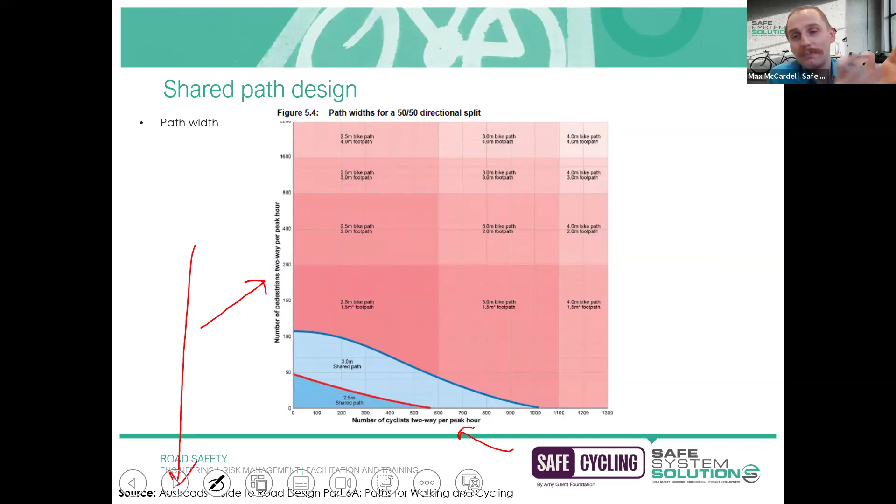What I really want you to take from this graph is if we look at just the extremes of both the x and y axes, in the top right-hand corner... sometimes my pen does that, and I'm not sure why. I've tried different pens, and sometimes it fixes itself, but sometimes it goes all glitchy. Let's try again.

If we have a look at the top right-hand corner there, you can tell these webinars are live by that kind of little mistake, though, which is good.

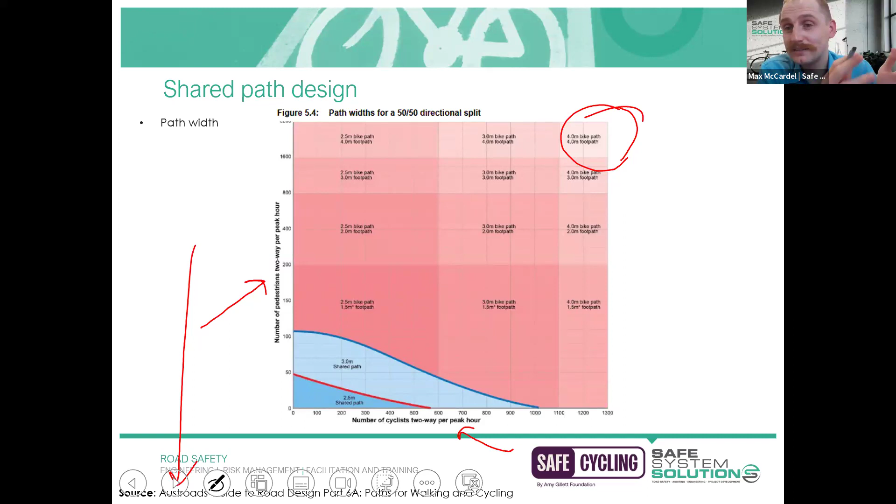Austroads is actually recommending a 4 meter wide bike path and a 4 meter wide footpath, because you've got such high volumes of pedestrians and cyclists that it's not appropriate to make them share one space - let's separate those facilities. This helps explain the reasoning behind that previous photo, but I fully appreciate that a lot of our design work is in the built environment, so creating an 8-meter space for active transport could be very challenging - it could mean knocking down buildings and things like that. So take all this with a grain of salt; you have to reflect on your constraints, but aspirationally it's a very good principle to have.

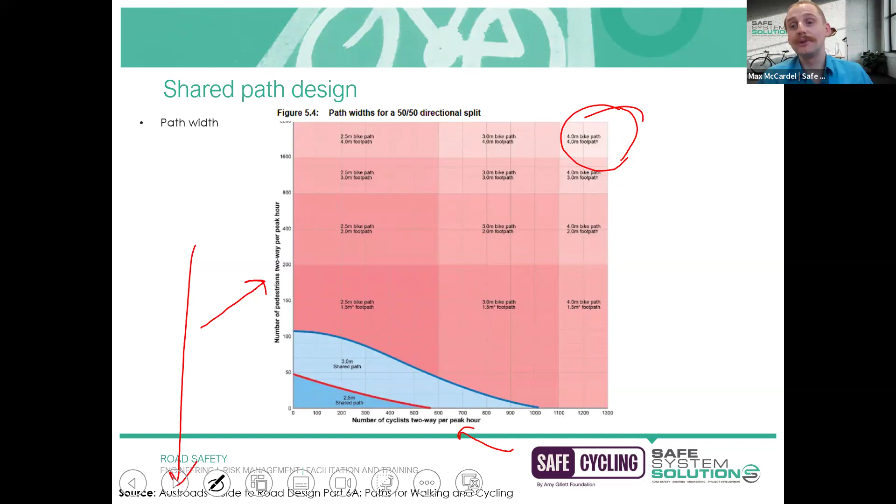Another way we often derive what our shared path width should be designed at is this idea of categorizing the function of the shared path. Austroads has three broad categories: a local access path, a regional path, or a recreational path. The latter two categories are pretty fluid with a lot of overlap, and there's no tight definition that easily points you to one or the other - that's just my take on it.

The local access path, shown in the photo on the left, is a shared path that wouldn't really have significant throughput traffic. If you've done road use hierarchy training, think of this like your local streets, not designed to have an arterial function - it's just trying to get a few riders into that local area, connecting to a residential community, but not commuter traffic. In those environments, we can look to adopt lower widths for shared paths.

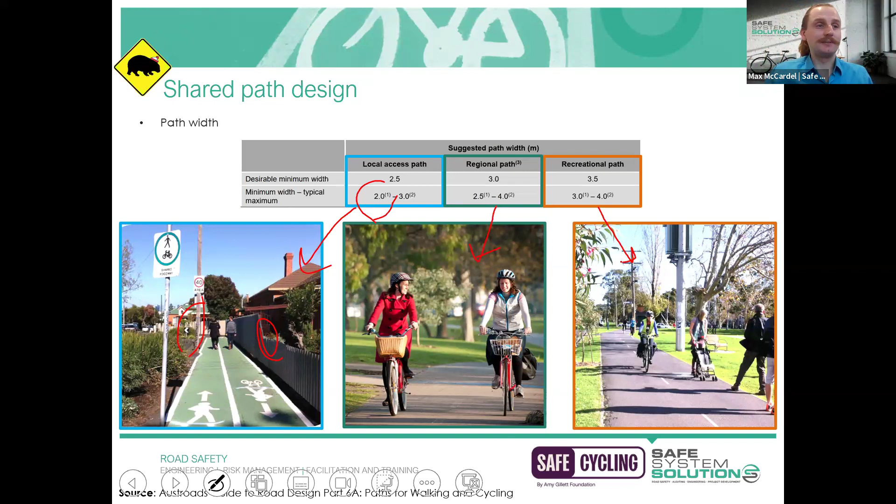Okay, let's look now at gradient. So we've picked our shared path width, say we're adopting a 3 meter wide shared path. Something we should consider is what is the gradient or steepness of our shared path. If you've done any surveying, you'd be able to work out your vertical geometry along the alignments. This graph in particular is used amongst the design community to determine how well received or how feasible constructing a specific grade is for the cycling community.

I think this figure is about 20 years old, probably older, maybe even from the 90s, so it's been around for ages. There's probably an argument that if the fleet is looking more like e-bikes, and uphill gradients aren't an issue for them, then perhaps this figure should be recalibrated to reflect that the typical bike is a bit different. But conversely, we're also seeing more heavier bikes, like cargo bikes, which would certainly feel the effects of the uphill grade. So there's lots of debate in industry about how applicable these graphs are, because they were developed so long ago with an idea of what a bicycle looks like, and the fleet really does look quite different.

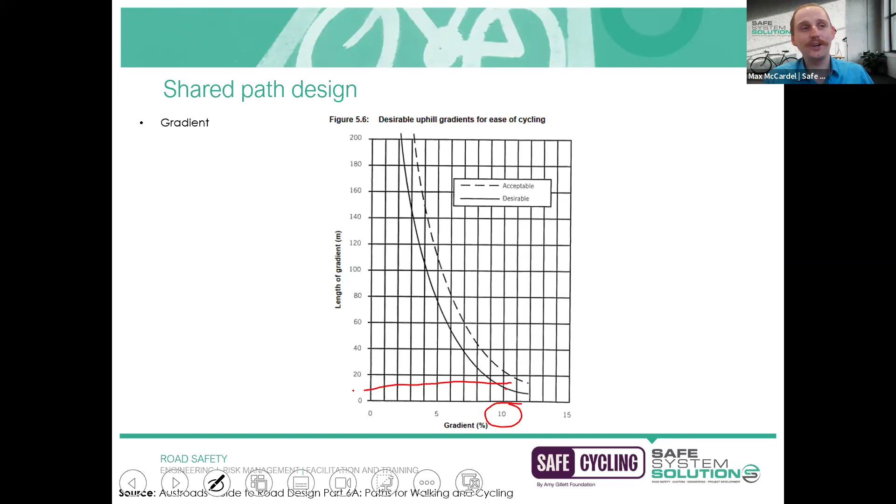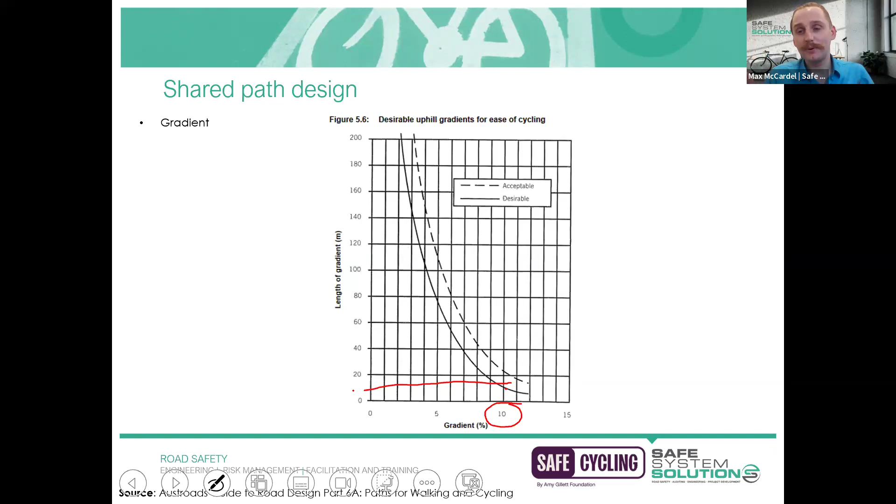What is probably less well engineered generally is, so you've got the understanding that uphill gradients can be an issue for riders, but we also need to think about if it's a shared path, it is likely two directions, meaning riders would also travel down that steep gradient.

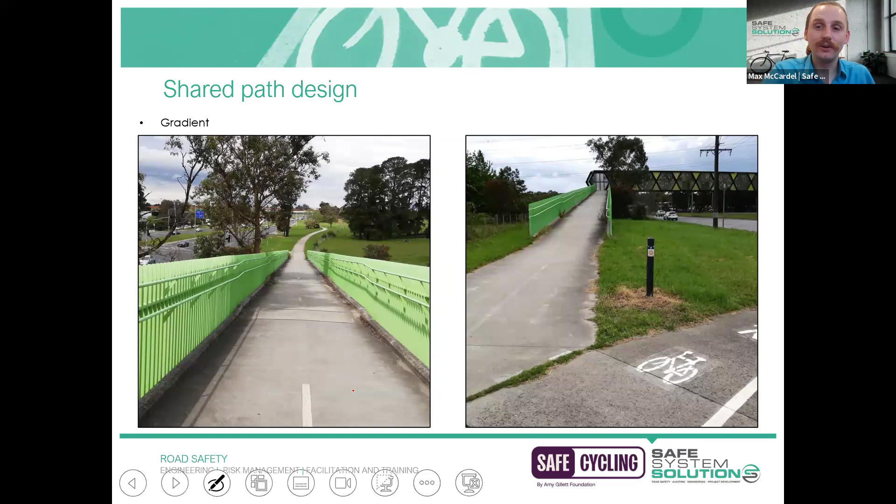Now, I've given this example here. This is a shared path that crosses over a carriageway, so you can see the overhead structure there. And the photo that is taken on the left is positioned right at the top of that ramp.

I've got a question for the group, so get ready to type your answers in the chat. I want you to try and work out what could be a risk for a rider traveling down this ramp. So the question is, what is a risk or risks that you can identify for cyclists riding down this ramp? I'll give you 30 seconds to have a think and get your typing fingers warmed up, and I'll check in with Catherine and Marissa if I've missed any questions.

Hello Max, thank you very much. Just wanted to make a point that in some jurisdictions across Australia, you are actually allowed to cycle on the footpath, in WA, South Australia and Queensland, and that's not the case here in Victoria. Just wanted to raise that because I thought there were some good discussions there, because there's also challenges to that, but also some benefits as well.

Yeah, so very good points. Also in Tasmania, you're allowed to ride on footpaths. There is, in the LMS resources, a quite useful resource guide provided by Victoria Walks, where they actually talk through the issues with shared paths and more broadly riding on the footpath, which goes through some evidence that's been collected over the years and some of the collisions that have happened with people just using the footpath. I kind of understand the argument on both sides, but yeah, it's a good read if you are working within that space.

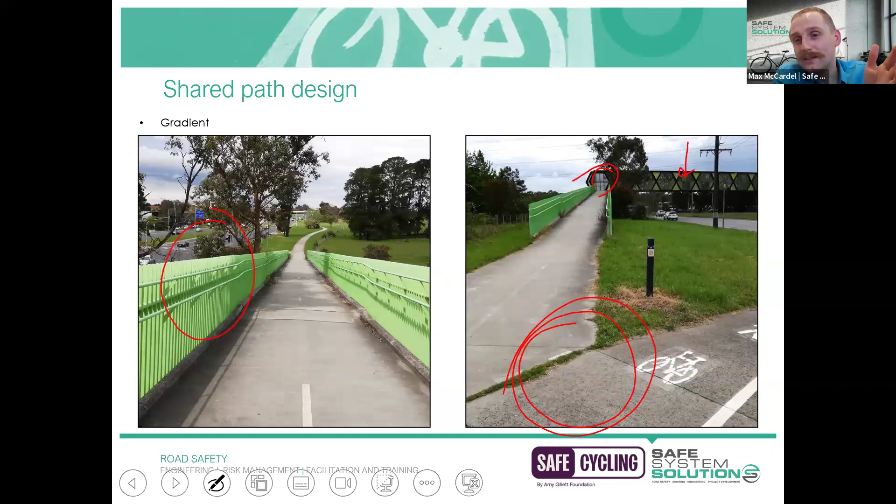So I think that's great that we've already picked up on that. And I also think it's great that people have identified that there are sightline issues with the kind of nice fencing, balustrade area that's being used there on the side. That actually provides like a solid wall, basically. So it's very, very difficult for you to be able to see any riders that may be approaching that conflict point. So not an ideal scenario.

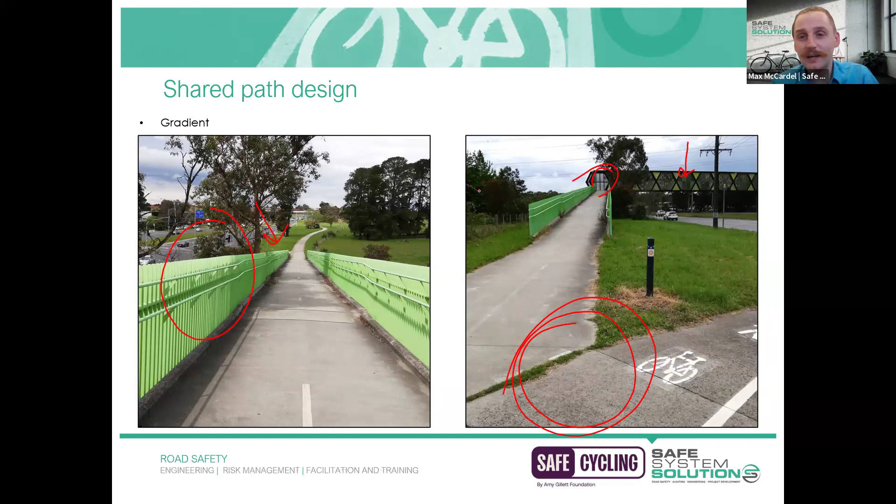We actually conducted a road safety audit, a cycling safety audit, at this particular site and picked up on this as a finding, and recommended that instead of having the conflict point right where we've got those sightline issues and also the high speeds for riders, can we move the conflict point further away so it's much easier to see, and also riders have washed off some of that speed. And very happy to report that has been constructed since, and we don't have that sightline issue there.

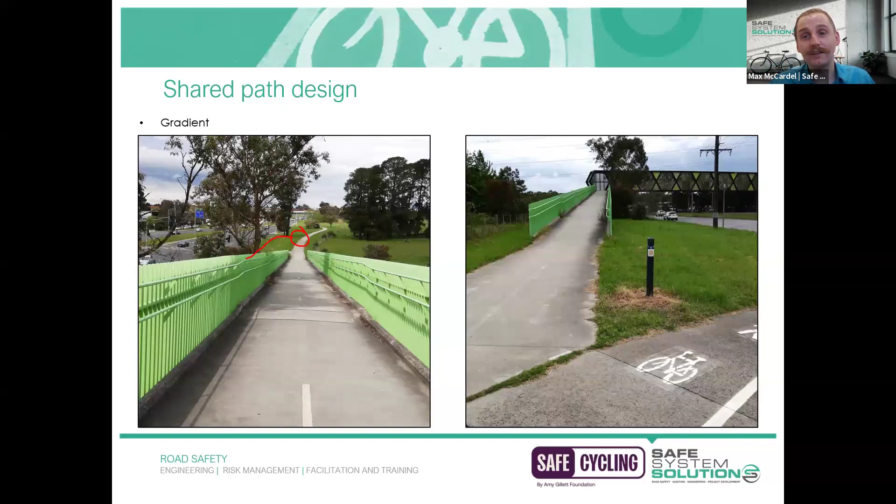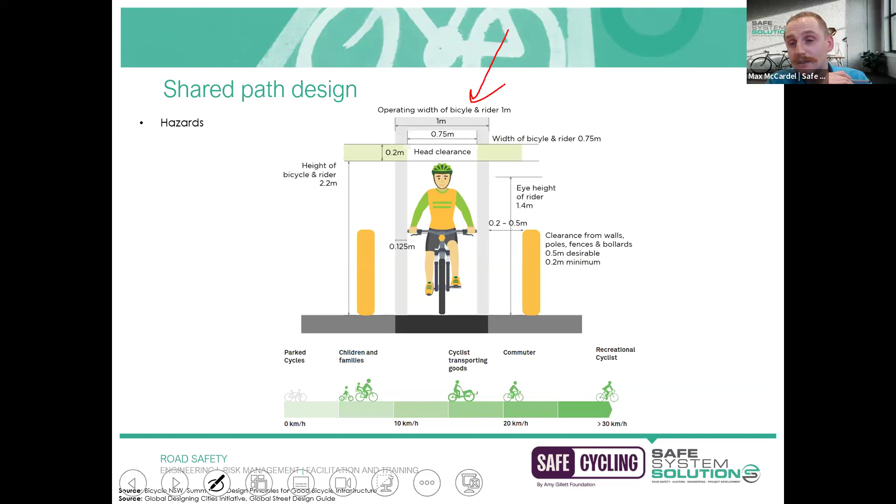Anyway, generally what we take as an operating width for the bicycle and rider is 1 meter wide. It's nice and easy to remember.

For head clearance, this is more where we see a bit of discrepancy. It can be between 200 and 500 mil, New South Wales is 200 mil. That's most relevant where you've got shared paths that cross underneath a carriageway, so it could go via an underpass or through culverts or something like that. That's where that head clearance is quite important.

So the height of the bicycle and rider is 2.2 meters. You want to ensure you've got another 200 mil there, so we're not knocking off people's helmets or heads or anything like that.

The other really important aspect of this figure is how far away we consider a hazard to be a hazard. The half meter there being used as desirable, remember that figure, as that's definitely the rule of thumb we use within industry. If it's within half a meter of that envelope, that's what we consider a hazard. The 0.2 meter minimum is only really applicable if the feature is designed to be struck by a cyclist, so a flexible paddle or cycle-friendly fencing or something like that. But half a meter for anything rigid that could be a hazard.

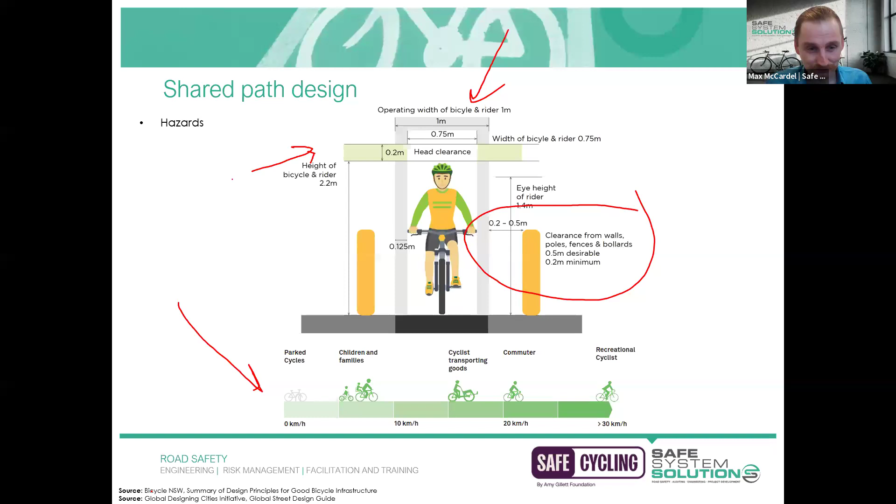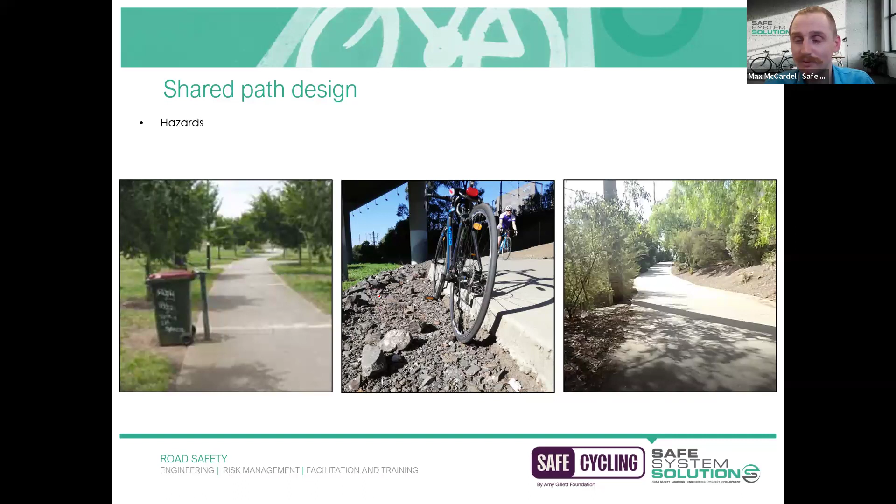Speaking of hazards adjacent to the path, this ties into my next slide, which is some common ones that we find. We do conduct shared path audits and like to make a note of common occurrences. Things like bins or furniture in general that are situated within the shared path instead of being pushed away from the edge of the path. It would have been a better idea to flip this one around to mirror that so the pole is not on the shared path.

Another really common one is having drop-offs. It's a bit challenging to see in this photo, but this is a concrete shared path. From what I can assess, it looks like when this was constructed, the crew went out, formed up their concrete path, took away the formwork, and that's it, job done. Well, you've basically just left this 125 mil drop, which isn't a significant hazard in the long scheme of things.

However, if you're riding and you happen to come off around this curve, it's virtually impossible to get back onto that shared path because of that significant lip, 125 mil or so. So the easy solution is just making sure that whenever you're building these things, you're battering up all the way to the top of the path so you don't have any of that level difference there.

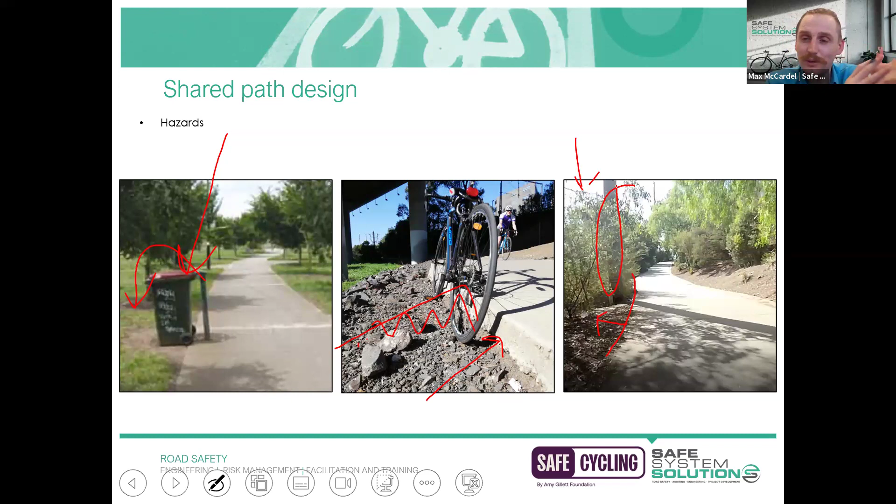There are a few ways you can go about reducing that risk, and in a perfect world you'd be able to relocate the pole outside that half-meter clearance, or underground the asset. But appreciate those are relatively expensive things, and it's not going to cause a great deal of harm if riders ride into it. It'll be annoying, it won't be broken bones, but it's unlikely to be on the black spot list or anything like that.

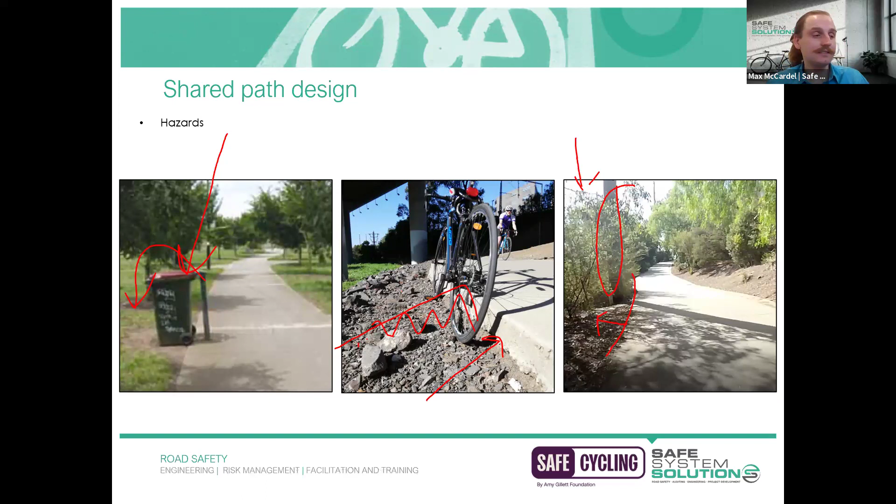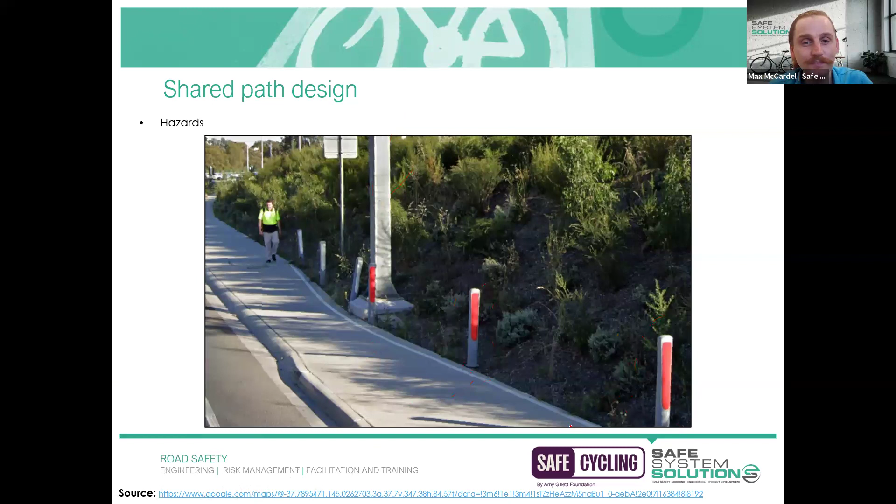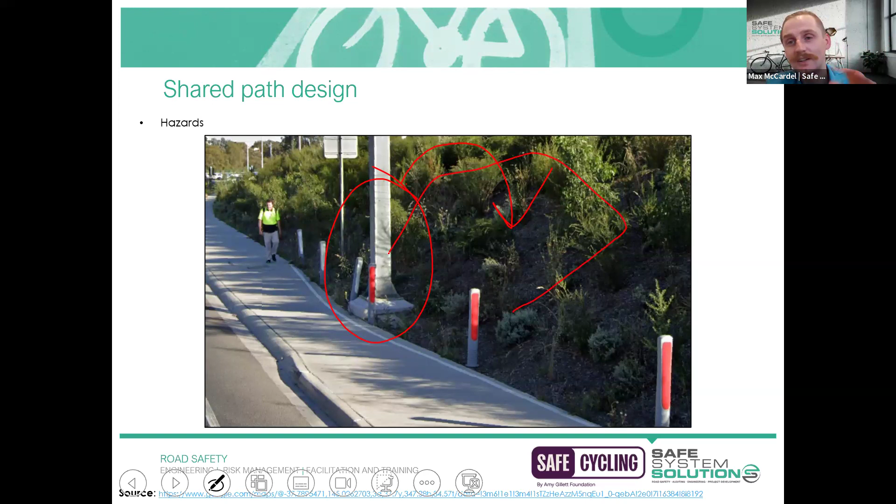By all means, this is not best practice—these are just pragmatic solutions if you're working with constrained budgets and sites. This is a relatively recent job, constructed maybe 5 years ago, and I think there was a real missed opportunity during construction and design to have identified this. Ideally this would have been installed a meter or so setback, so the shared path width could be maintained all the way through. You wouldn't have to worry about any of this, just install retaining walls or some structure there so the embankment doesn't fall into the shared path. So a really good example that if you're in the design phase, it's much better to pick up on these issues early and reduce that risk as much as possible, as opposed to just highlighting the hazard, which doesn't really get rid of it as a risk.

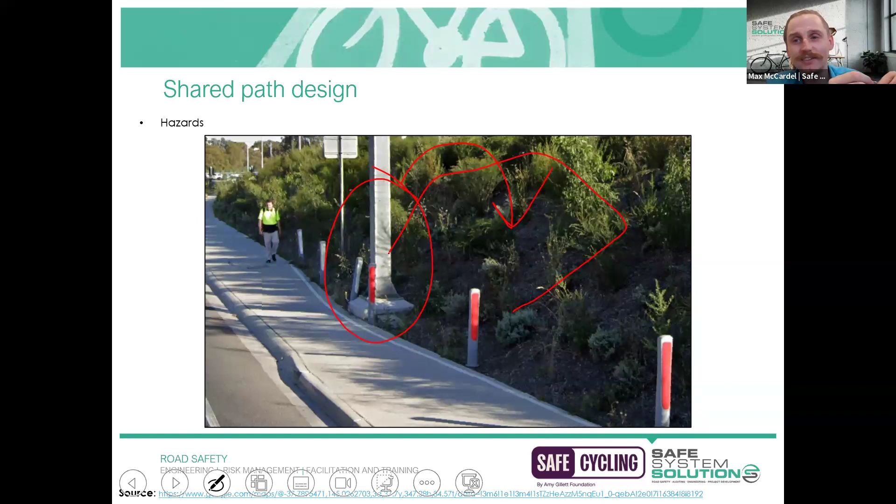All right, I've got some sightline calculations, and for those who aren't designers or engineers, this might look a bit like Latin—that's okay, this won't be part of your quiz, so don't get stressed, we're not going to make you do any of these calculations. But we did want to include this as a reminder for those involved in technical design that there are stopping sight distance calculations for riders. You're probably used to doing sight distance checks for vehicles approaching intersections, getting the minimum gap and things like that—a very similar calculation applies for bicycle riders. So we just wanted to make sure you're aware of that.

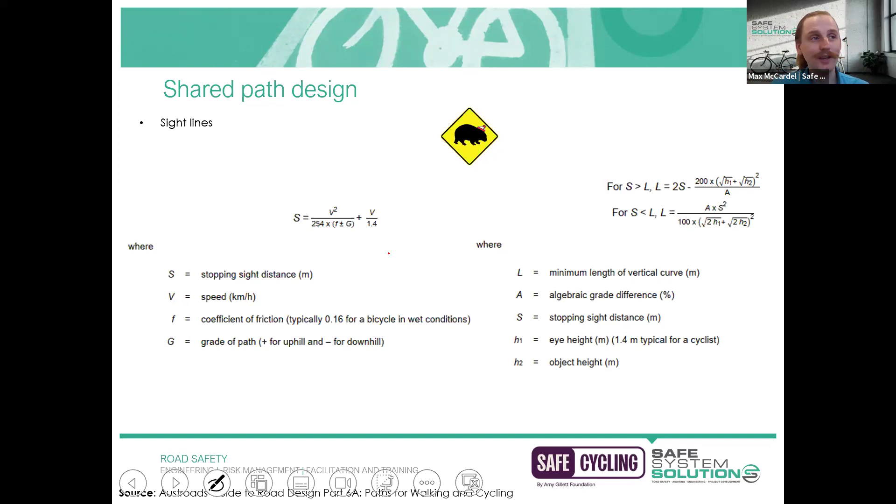The calculation is important for both the horizontal geometry, like the curve around a bend, and the vertical geometry, so whether there's a crest. Just wanted to make you all aware of that, and I'll speak more about those sightline requirements in a second, but I'll check in first with Marisa.

Hi, Max. Hello. There's been some discussion around magpies. And now I know magpies are kind of dear to your heart in a different way, especially... they certainly are. AFL 2023 premiership type magpies. But that's not the one I'm referring to at the moment.

We've just had some discussion around magpies and being hazards. So the question is, are magpies and other swooping birds considered hazards in shared path audits to consider for warning signage treatments, similar to animal crossings?

Great issue. So if I was doing a shared path audit and identified an area of concern, my role as an auditor would be purely to note that as an area of risk. As an engineer, I have no idea what can be done there, and I don't think I should be making recommendations because that's not my field of expertise. I'd say liaise with an environmental officer or an arborist if you need to remove a tree or something like that, but it's not really a call for me to make.

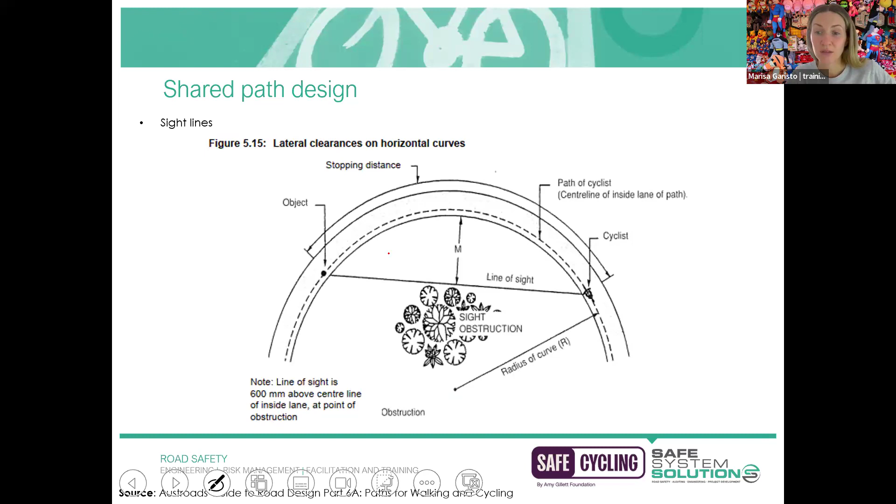We've had Georgia suggest that perhaps shade structures could be added along sections of paths. And Danielle's let us know that there's been a fatality on a shared pathway due to a magpie strike. That's a little bit unfortunate. Oh my gosh, that's awful. I've never heard of that before.

Okay. Hand it over to Catherine. I was just going to chime in on the magpie subject. It is frightening. We have one out the front of our house, and we do see school children, obviously during springtime when they're looking after their babies, and that's when they become most aggressive. Kids and cyclists going past and just watching them get swooped. It's awful. I think many people have been swooped, whether walking or cycling, and it's terrifying. So that loss of control when you're on the bike is certainly a high risk.

And I think, as Max mentioned, from an audit perspective, we can certainly highlight these issues. I know we reported the issue to council - they've got specialists within the council that can look into it. It's definitely a specialist area, but certainly a hazard.

Good stuff, thanks for sharing your input there, Catherine. I've actually been really lucky, I've never been swooped by a magpie, and I think that's because I barrack for the team. I get swooped by mynah birds and blackbirds all the time, no problem there, but magpies leave me alone. They recognise the familiarity - I think it's because I'm a Freo supporter, they see the purple and they're like, get out of here. That's right, there you go. But my sister, when she was quite young and going off to work every day, she's terrified of them because she used to get attacked. But yeah, it's a serious thing.

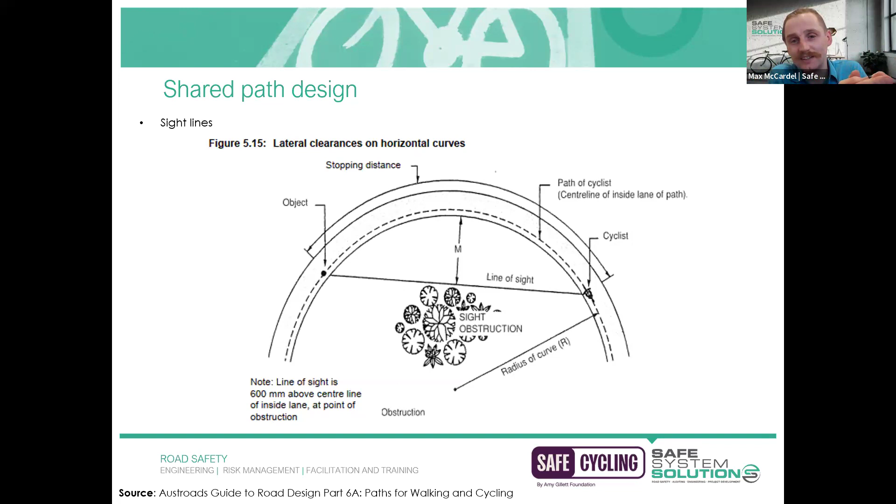Basically the reason that you want to do these sight checks is if there was an object, something that the rider would like to avoid, that they've got adequate stopping distance to be able to avoid it, so they're not going to be forced to ride into it. That's what those sightline checks are for.

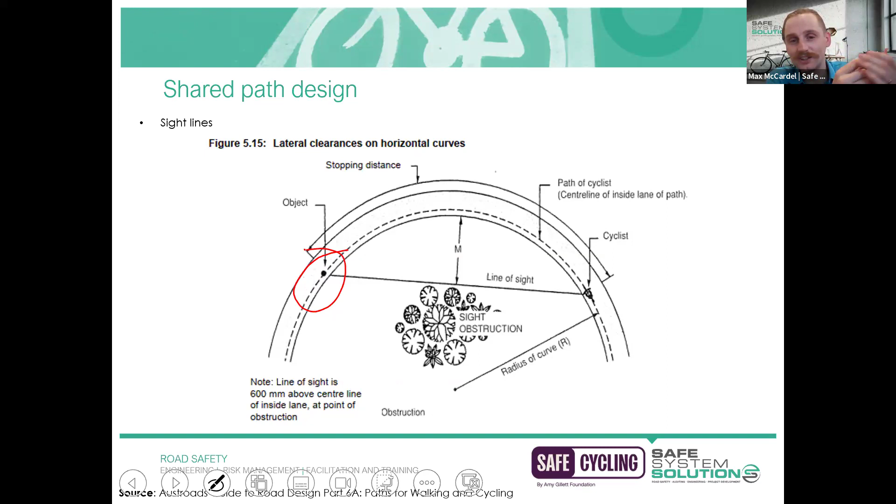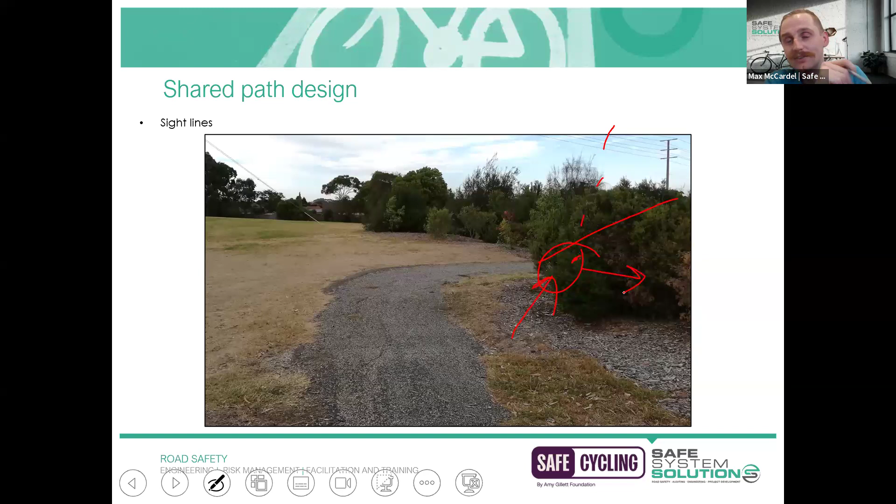So that's the purpose of those sightline checks. It's really, really common to be recommending trimming of vegetation to open up those sightlines, or if you're during the design process, moving the vegetation further away, closer to the center of the radius, just to make sure that you don't have these issues.

We may implement fencing depending on what the adjacent shared path area looks like. Austroads have 2 categories for fencing. One is called a partial barrier fence, and the other is called a full barrier fence. I'll explain exactly what those 2 are in a second.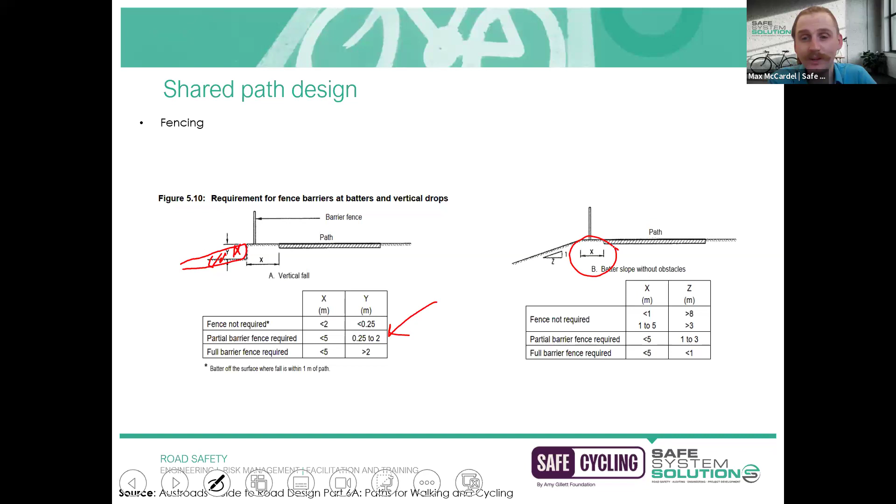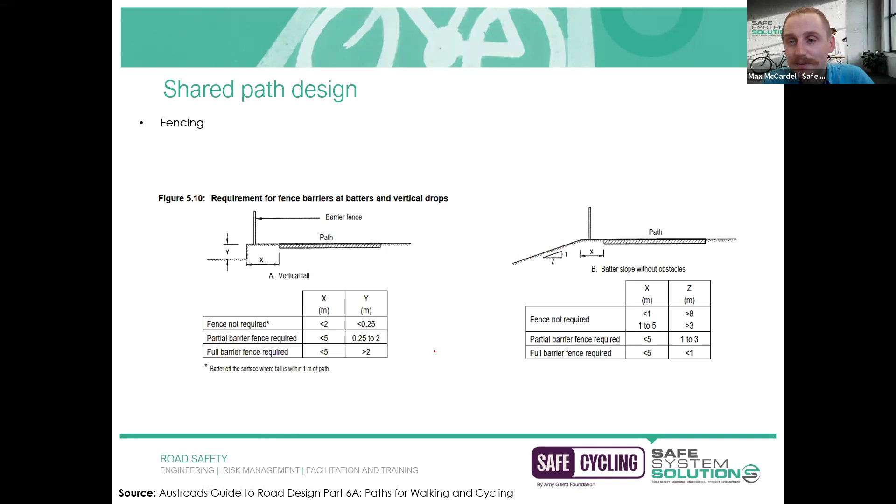And the ratio that's used is 1 to Z. So for those that are familiar with slopes, batter slopes and things like that would be familiar. Just basically saying the steeper that it gets, the more likely you require that fencing. Partial barrier fence is when it's between 1 to 3 for Z, or full barrier when it's less than 1. And when it's 1 to 1, remember that's like a 45-degree angle.

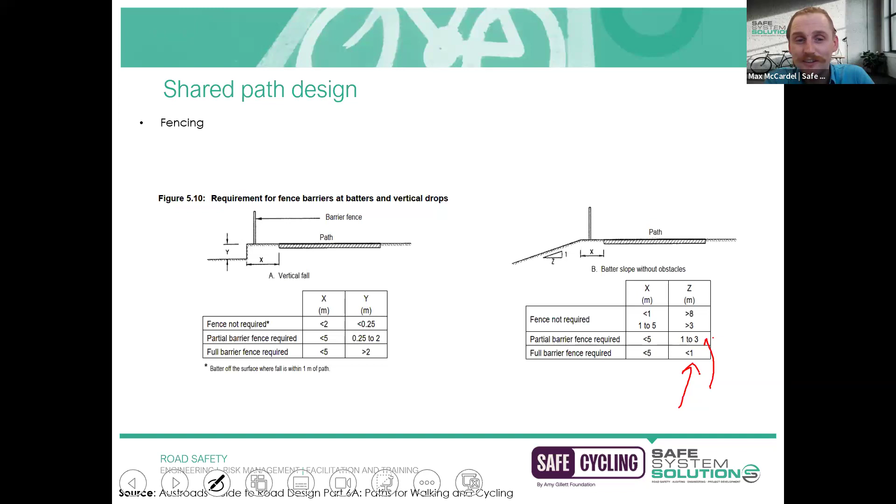It's very, very steep. So the two categories of fencing there, partial barrier and full barrier fence, this is what they look like. The one on top is the partial fence, and the reason it's referred to as that is because it's got these openings, so theoretically people can still fall through it.

We actually had a participant a few months ago that shared a story of their child that was riding along a shared path and fell through one of those gaps. So it does still pose issues, and it does not have the same containment as the full barrier fence, which is shown below - that's where you've got the vertical members all the way through, completely eliminating the risk of anyone falling through. You could theoretically still fall over it, go over the fence, but it's pretty unlikely.

In my opinion, this is very much overcomplicating this issue, and I'm not really sure why they went with this approach.

But it must be much more expensive, I'm guessing, to be installing these things than the partial.

But anyway, the most important feature in my mind, whether you're doing either of these styles of fencing, is to ensure that you're providing a smooth rail. You can see it's provided in both of those general arrangement cross-section views. The purpose of that smooth rail is it's deliberately set up so that if a rider is losing control and is veering from their path, their shoulder to their elbow is going to collide with that smooth rail. So that's going to be the point of collision. It makes it much more likely for them to be able to stay on their bike and not become destabilized or go over the handlebars or go over the fence or anything like that.

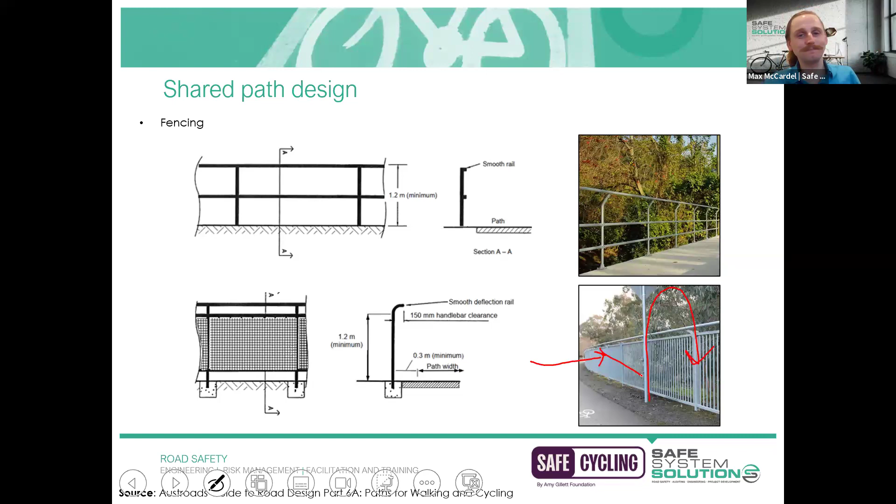A few other fencing things. We want to make sure that we're using rounded posts, nothing with any sharp edges, nothing that could be snagged on handlebars or things like that. So that's why the protruding rail there reduces the risk of handlebar snagging, because your arm's going to hit the thing instead of the handlebar. Nothing that curves inwards or anything like that.

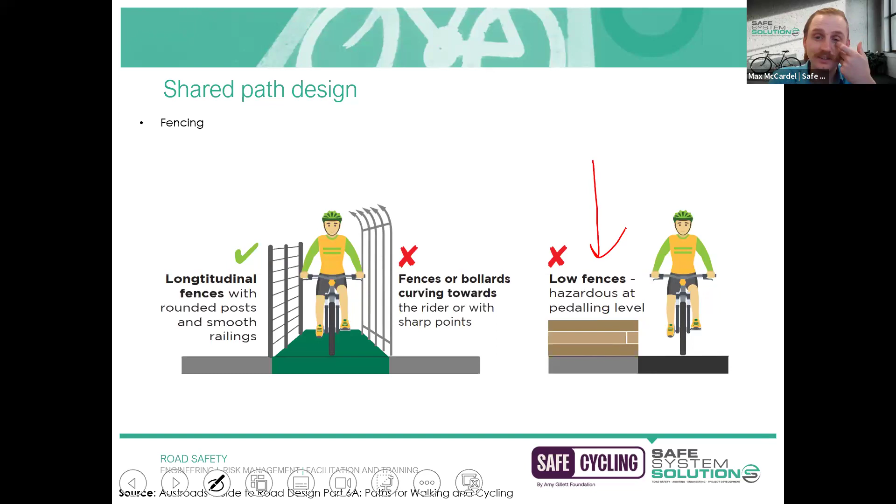Also be mindful that low fences can be a hazard for riders. So things like planter boxes in particular, that can be a pedaling risk. The height that's generally used there is between 200 mil and 250 mil. Anything higher than that could strike a rider's pedal and cause that kind of issue. So I just wanted to make everyone aware of that one as well.

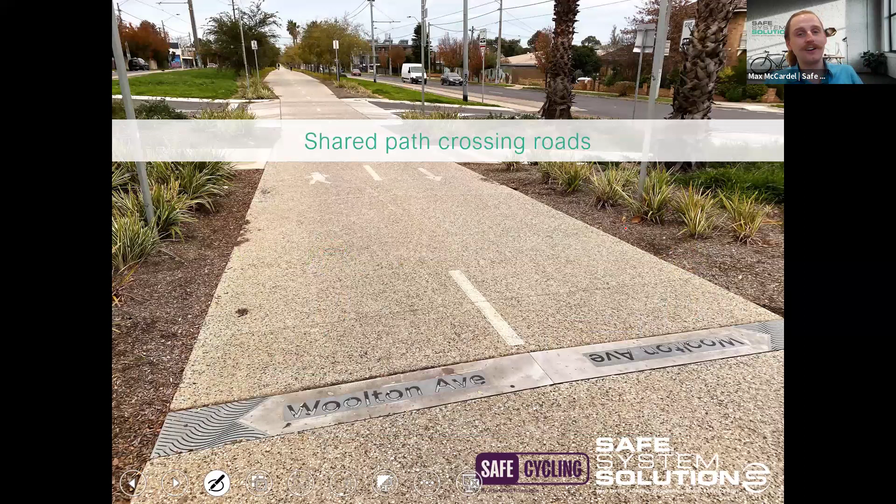All right, so we've gone through quite a bit of info about the shared path design, and we might launch another poll just to see what everyone's take is on fences in particular. I'll move this down a little bit so you can have a better look. The question is, do you reckon we should be installing fencing along this shared path? I'll do a little drawing of what I'm talking about. Like, do you reckon we should put a fence somewhere here? Yes or no is the poll question. I'll give you 30 seconds to have a go at that, and I'll check in with Catherine.

Hello, Max. A question around fencing: is a vegetated barrier acceptable? I wouldn't say so, because the cycle-friendly fencing is actually set with that protruding rail between 1.2 and 1.5, which is deliberately designed to hit the rider's arm. I think you'd have a challenging argument to use any type of vegetation that could provide that deflecting property. If you were using vegetation like this, where it's nice and flat and things like that, then there wouldn't be a need for a fence at all.

But I think I just gave away the poll question then. I set you up there, didn't I, Max? Yeah, whoops. Oh, good, thank you. But yeah, vegetation, we do talk about that, don't we? Ways that it can be used effectively. Yeah, it comes up in various topics. Thanks, Max.

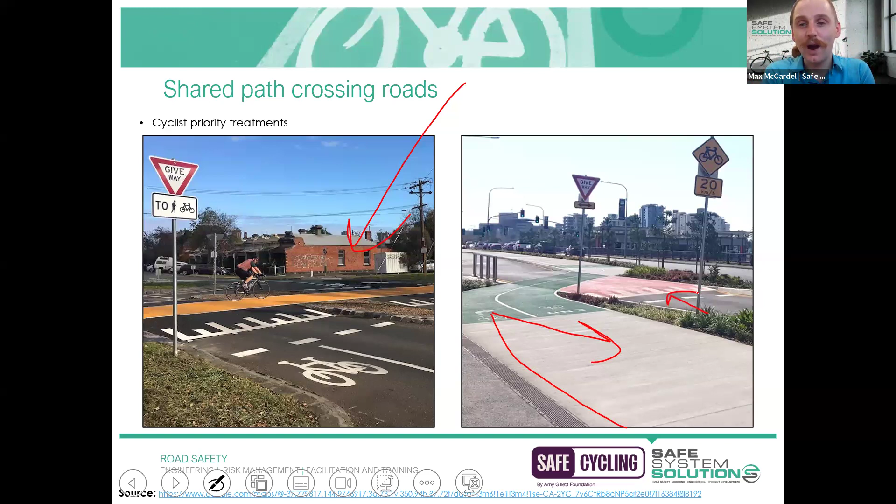So the fourth person typed in the sightline challenges associated with the example on the right. If you were riding and getting ready to cross over this, although you've got priority, it's pretty difficult for you to turn back on yourself and do a quick head check to make sure there's not a vehicle going through. A vehicle may also not really appreciate that they're giving way - they may only expect to give way to users oncoming and not necessarily think to look the other way.

Wherever we do have conflict points, we try to make them as close to perpendicular as possible because they maximize the sight lines. It's a lot easier as a bike rider to spot if that vehicle is going to yield, and also for that motorist to spot the cyclist and make eye contact. So it's a lot easier when that perpendicular conflict point is provided. That Brisbane example - fully appreciate the constrained site - you've got to work with the geometry you've got there, but I think it articulates that sightline requirement quite well.

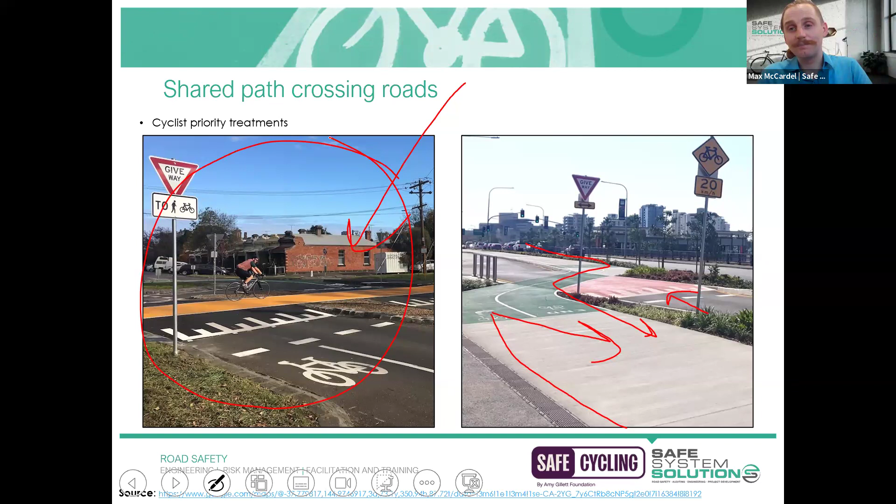Here's a photo of what this site actually looks like on the ground, and you can see there's been quite a lot of sudden braking, with all the skid marks there from riders. So perhaps emphasizing that at the last minute, riders are forced to engage in emergency braking because the vehicle hasn't yielded. Just wanted to share that one as well.

Okay, we'll move on to bollards. We spoke before that best practice, if you're crossing over a road, is let's raise the conflict point, let's award the priority to pedestrians and bike riders. Unfortunately, we have lots of examples of not doing that and instead installing bollards, because the idea is bollards can be used to discourage vehicle entry, but also be used as a sign that riders are approaching a road. They shouldn't be used as that type of treatment at all - they shouldn't be used to slow down cyclists, because they should be identified for what they are, which are hazards. So I spoke before that anything within half a meter of the edge of a shared path that's fixed would be considered a hazard. Bollards are really common to install right in the middle of a shared path and absolutely should be considered a hazard.

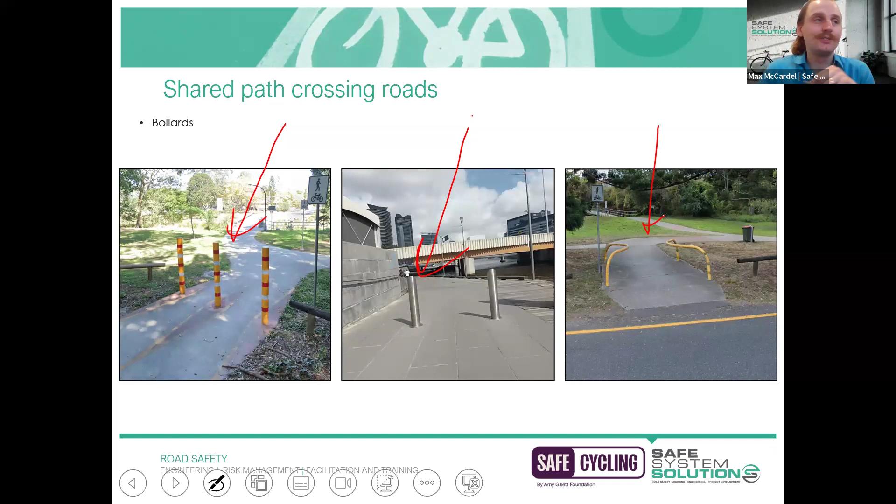So some examples: one, you've got three bollards being used there that's going to tighten up cycling movements. This one in the middle is just a terrible example of not providing a contrasting material, so it blends in very well with the surrounding bluestone. And the final example, once again up in Queensland, is the banana bars, which are no longer installed and are in fact getting ripped out because of that squeezing effect as well. So not used, not recommended anymore.

We've got lots of different bollard types - timber bollards, chicane treatments can be quite popular as well. The thing you need to be mindful of with the chicane type of treatment is whether or not there's actually enough space for cyclists to do that movement comfortably. Particularly with cargo bikes - you can see cargo bikes get stuck in this area or find it really uncomfortable to maneuver if that geometry is too tight. So something just to be mindful of.

And the final one we've got here, this is riding into Hobart, using this U type of bollard once again to make riders aware that they're about to approach a road. I think putting this solution in place, which is a 24/7 hazard, is a little bit naive and something that we're just used to seeing and something that we've done historically.

We should be acknowledging that these are hazards. People do ride into them quite frequently. And if you look at it in this context where there are no riders around, it seems like the most obvious thing, and you're like, how could people ride into that?

Well, the most common scenario is when you've got riders in a bunch, or pedestrians, and the person at the front of the pack may well be able to see the bollard and do a quick maneuver around it. But riders behind within that pack are completely oblivious, and that's when those collisions can occur. So just my two cents on it.

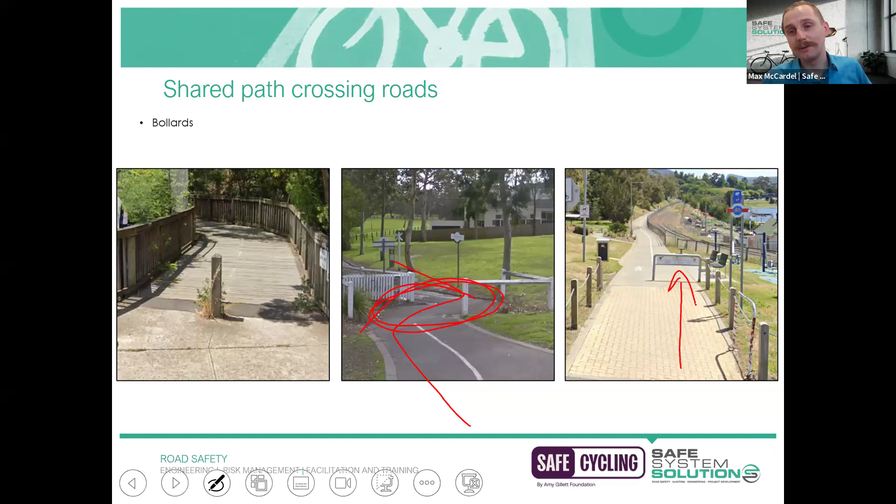How do you prevent vehicles entering a shared path? What would be the alternative solution? Yeah, I've got a figure coming up in a second that can provide a bit of context. All right, thanks, Max. No worries.

Once council heard that there'd been this incident, they went out there the next day and gave it a fresh coat of paint and some more delineation tape and things like that, but the physical hazard was still there. When Andrew collided with it, he broke his wrist and had some facial injuries and things like that.

He called up the ambulance, and whilst he was waiting, he witnessed three other riders hit the same bollard. So we do have a police crash record of Andrew because he went to the hospital and there was a report issued. But those other cyclists, we do not have any data that there was a collision there other than that experience. So it's a good reminder that they are hit very often and most commonly underreported. We know that cycling crashes are incredibly underreported because riders do not know who to talk to. Just be mindful that they are real hazards.

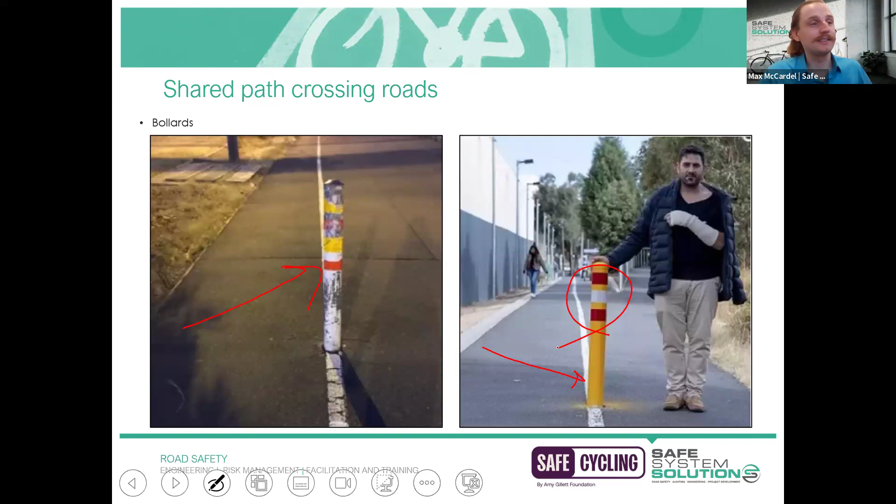It's also possible to put a bollard within that space if you were able to maintain that half-meter offset from the edge of the path there. Those kind of solutions work a lot better. It really makes it clear that riders are no longer on the shared path, that they're approaching a carriageway and need to slow down. And it will also do a very good job of deterring that vehicle entry.

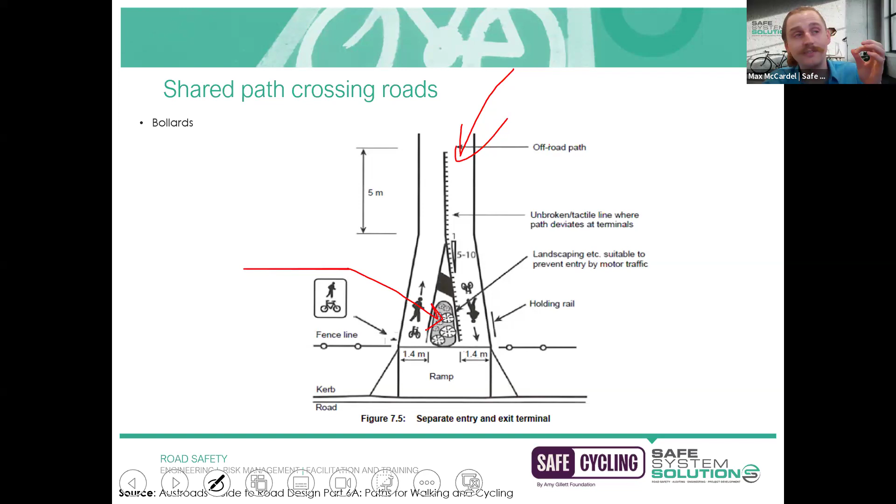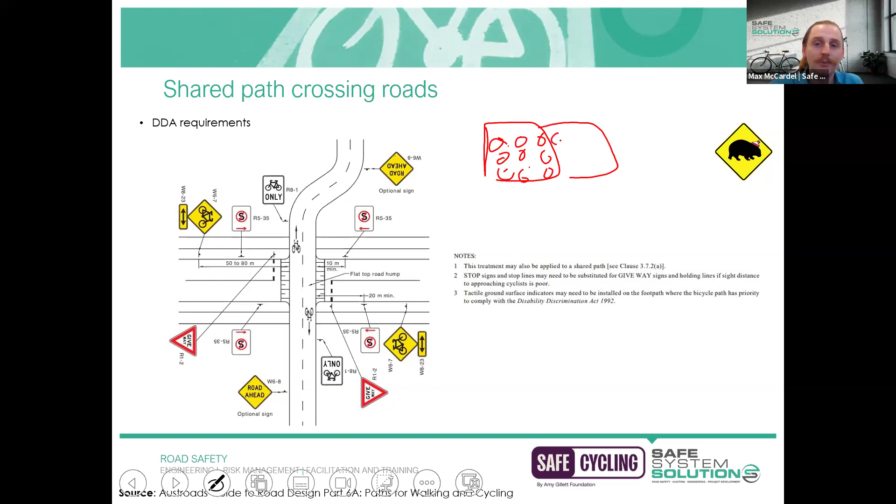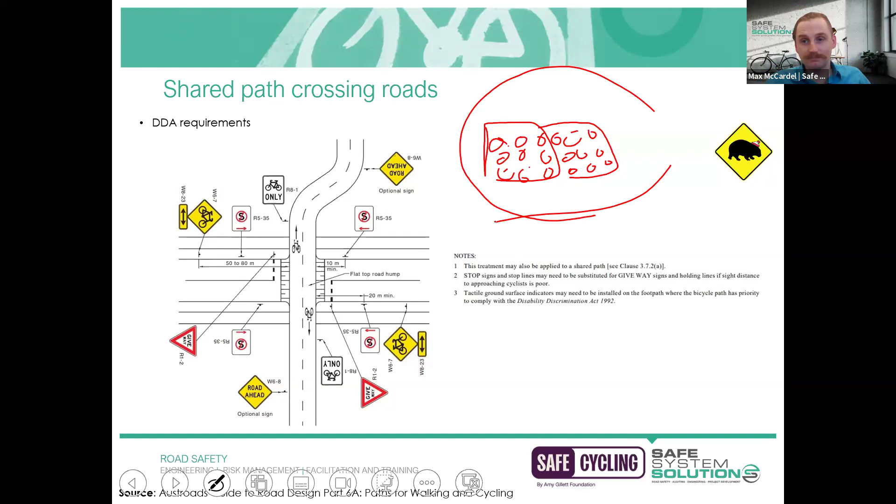This is just a reminder that if you are doing any shared paths, you need to consider that these are accessible to all members of the public, including those with disabilities. Therefore all clauses of the Disability Discrimination Act, the DDA, are still prevalent. Mostly that comes in the form of tactile ground surface indicators, TGSIs, or the braille plates that sit before you cross a road, still applicable at shared paths where they're interacting with the road environment. Make sure you're always referring to your DDA clauses to be compliant, because people with vision impairments still need to be made aware that they're crossing a carriageway.

Okie dokie, so we've got shared paths now crossing over other shared paths. This is another opportunity for you to chime in with your own thoughts. The question we've got for you is, what's wrong with this photo? We've got a really confused looking cyclist there. Question for everyone in the group: why do you think she's confused? What's wrong with this photo? I'll get her out of the way so you can have a good look at that.

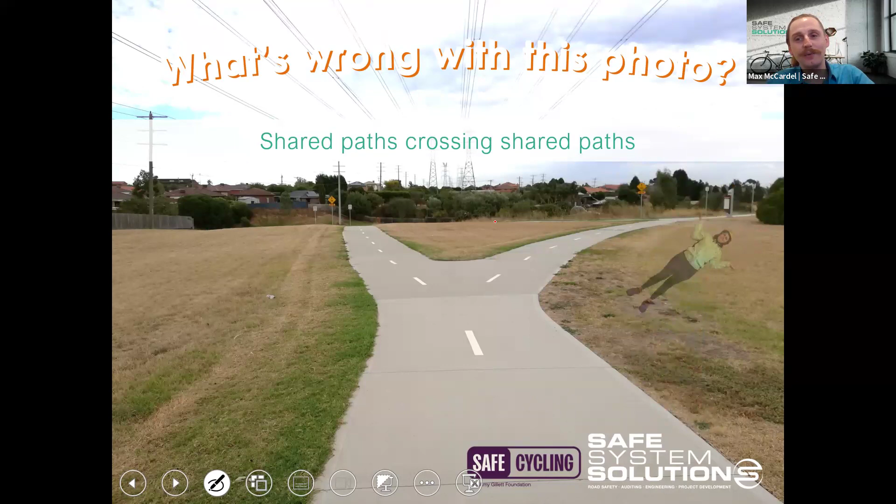And while I wait, I'll check in with Catherine if I've missed any questions. All good at the moment, Max. Oh brilliant, yeah, no, it's all ticking along well.

There was a question that came in about managing dirt bikes on shared paths. Yeah, no, that's very valid. Some of the bollards are deliberately spaced so close together that dirt bikes can't fit within there. I still don't think that's a good solution, because it depends on how regularly you're experiencing access from dirt bikes, but I feel enforcement activities may be more of a push to deal with that as an issue, as opposed to putting in infrastructure which is also a hazard for all bike riders that travel through there. But yeah, it's a pretty good debate, and people will have different opinions on what would be the best solution for the community. That's right, and it's quite a unique situation, isn't it, in those more regional areas. Yeah, there is that dirt bike activity. Yeah, absolutely, yeah.

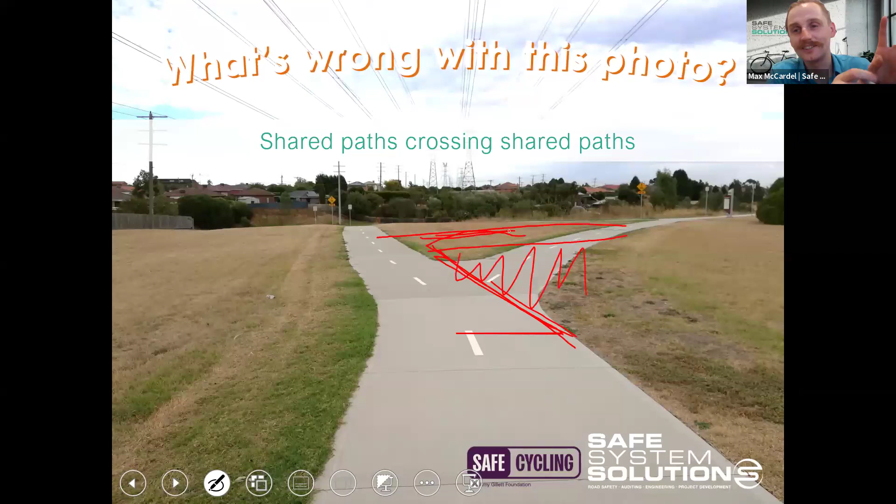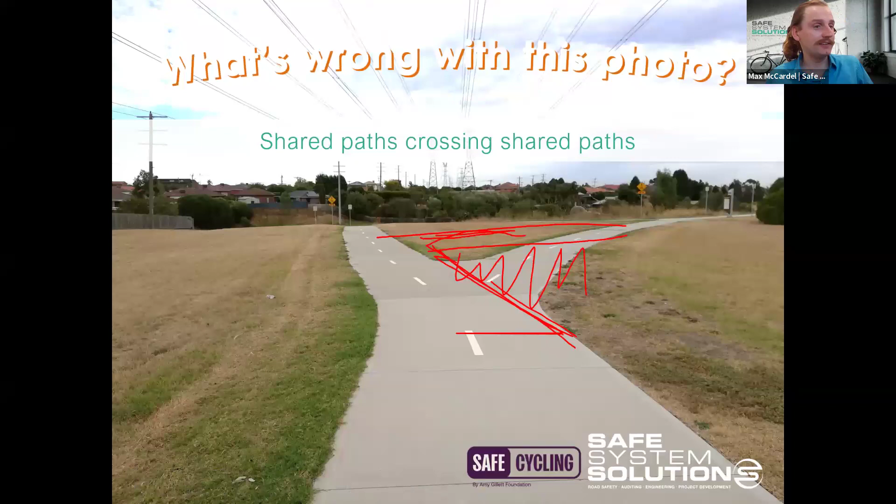Another good tip is trying to square up any of your conflict points - bringing the shared path out so it looks more like a T intersection, then putting your stop line in, and your stop signs or give way signs. The T intersection is a lot better at ensuring that the leg that's meant to yield actually does. Good notes in there too, and it's good to see lighting has been picked up as well.

Austroads actually developed a report on bicycle wayfinding, because across our jurisdictions we do lots of different practices in how we highlight where a journey is going. It hasn't prescribed harmonization, but reflects on what would be most recognizable and understood by the community, suggesting changes that could be made within industry. I think it sheds light on the importance of the issue - if Austroads are willing to spend money completing a research report in such a niche field, there's likely a reason. The reason is we're just not very good at bicycle wayfinding in Australia. We tend to forget about it, or it's an afterthought that doesn't get installed.

So just a reminder that if you're working in shared path space, make sure you're developing a signage scheme that is consistent with your jurisdiction and provides wayfinding for riders throughout.

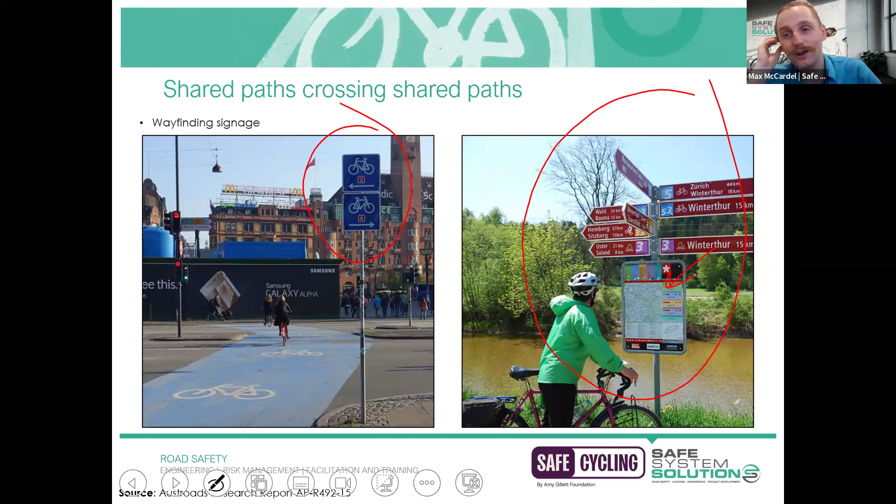But we see it used incredibly frequently in other jurisdictions internationally. The photo on the left is Denmark, where it's very common to use a numbering system - if you're on route number 2, it goes from the central train station all the way to the market square in the city. Even if you can't read any of the language, you know that following number 2 you're pretty safe. I think that's a really good approach. Similarly, on the right we've got an example from Switzerland, using numbering of different routes and also providing a little 'you are here' map showing where all the routes go - once again making it as easy, accessible and attractive for riders as possible.

Now, when shared paths cross over other shared paths, we want to be really careful how we manage speeds. The example here is City West train station in Perth. You can see the train tracks, and this is a pedestrian gate interchange - during peak periods you'd have lots of people queuing on the other side of the tracks waiting to cross, then the gate opens and you get a flood of pedestrian traffic heading across the shared path or bicycle path, up towards the platform or concourse.

Because you've got this hive of activity occurring in waves, some thinking was done around making sure riders slow down within their space, so they're aware this kind of surge of activity does occur. The way this has been designed and installed is similar to what we'd do in a traffic environment: let's do some curb and channel.

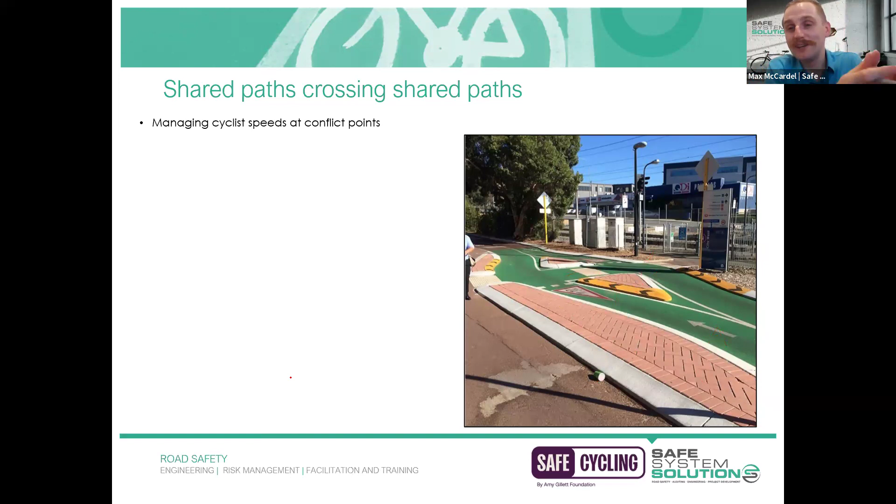Another solution that could be utilized within this space: we spoke before about trying to get vehicles to slow down as they cross over a shared path by raising that facility. The same premise and principle applies for shared paths. You could install a raised crossing for pedestrians here. Pedestrians are on this raised surface, and these ramp grades could slow down cycling traffic. Once again, vertical deflection is really king because it's very effective at slowing down speeds and making people more aware there are priority changes or changes to the environment they need to be aware of. Just another solution that could have been looked at here.

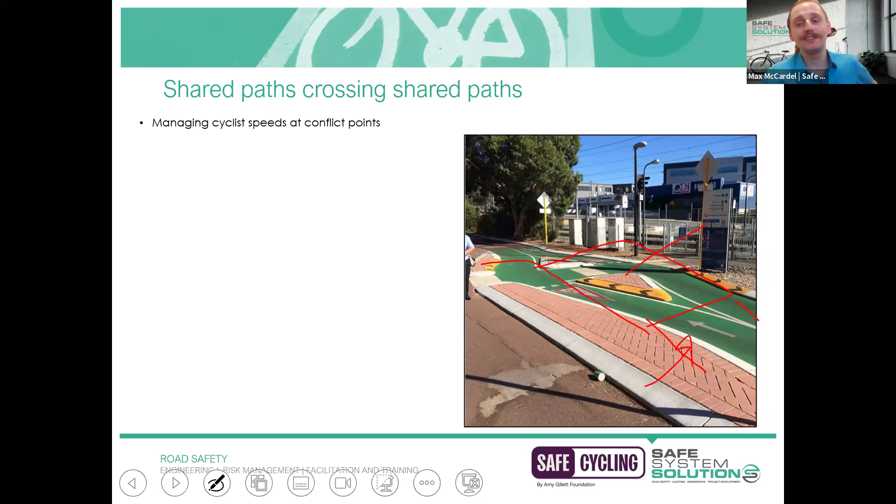Now, something else that often gets installed at locations with that influx of pedestrian activity is things like pavement markings saying 'slow down,' or even signage that says 'pedestrians crossing.' Personally, I don't think there's a lot of benefit in doing markers like that, other than it looks like you're trying to do something. I don't think they're incredibly effective, because by the time you read that pavement marking, you're probably already at the conflict point. So they're not really the most graceful solution, but anyway, you might see them out and about.

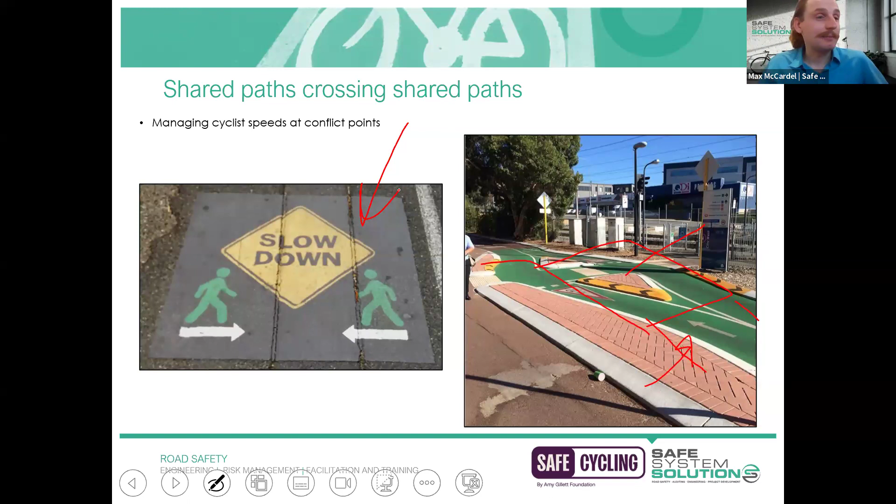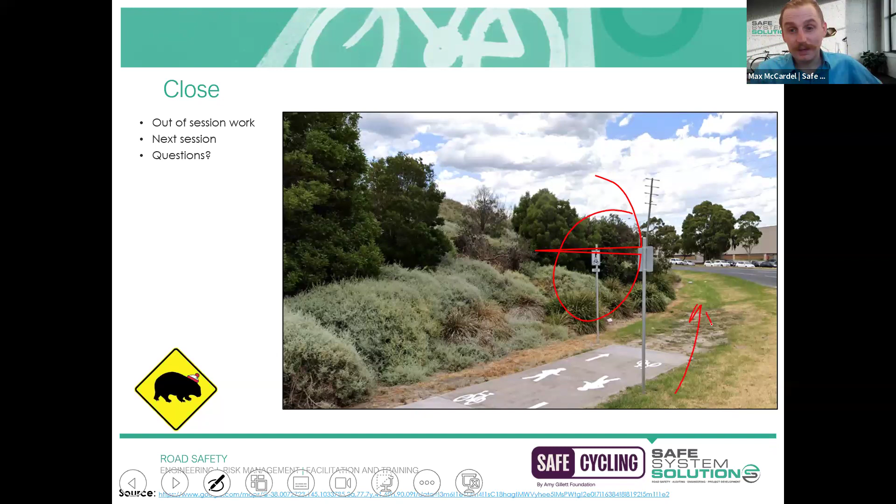I did want to spend a bit of time on the LMS, but just to close out today's session, I thought it was important to reflect on how we close out our shared paths, having a good think about whether we're meeting the community's demands and what they'd like to see, and if we're connecting them from A to B. This is an example of a shared path where just putting up the shared path end sign, and that's it, job done. It's not a great scenario at all, because you can see by the goat tracks that some people want to continue, and how is that going to be managed?

So have a real think about where you're ending your shared paths, that it ends in a suitable location and you're not promoting continued travel through the area. The reason this in particular is quite a significant risk is that this is an arterial road with a huge multi-lane roundabout, and it's not a great environment to be pushing more riders into. You can say you're not trying to push them in because there's a path ends sign, but it's a little bit more nuanced than that. So make sure you're thinking about the strategic function of your routes as well, and that you're able to provide those connections.

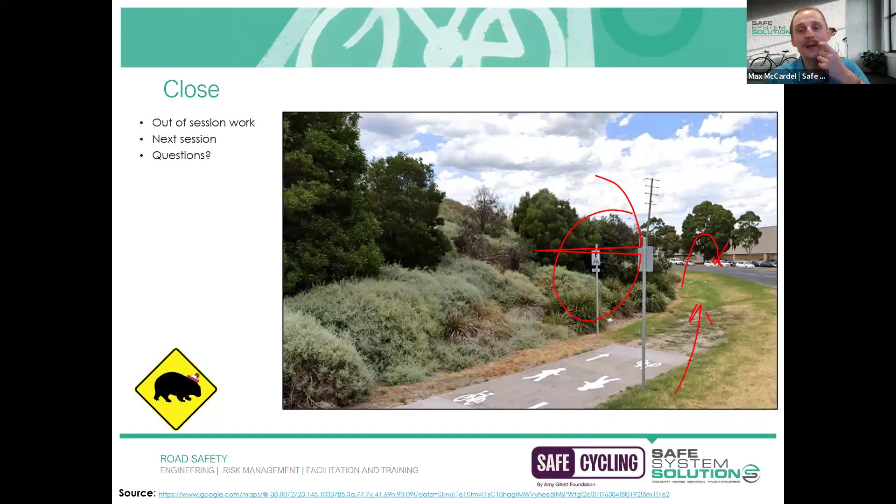Catherine: we've been informed by David and Ben that this has been fixed. It has been fixed. Fantastic. I drove past it the other week and thought, should I take it out of my course? But then I figured I could find plenty of other examples of shared path end signs. Oh, me too. Yeah, me too. Thank you, Ben. Thanks for letting us know that's been fixed, and we'll give a prize out for those people who mentioned that.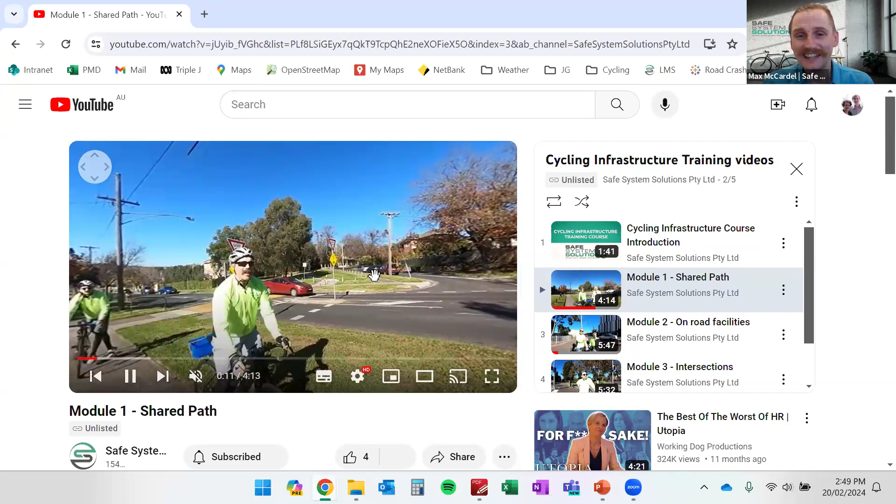I'm just going to click on this one here, and it will take me to another link, which will take me to a YouTube site. And, oh no, I was going to say it'll take me to an ad, but it didn't. This is a 360-degree video, so it works the same way as if you were on Google Street View - you click the mouse and drag it around and have a look at everything that's going on around you.

You can look at the birds in the sky and things like that. This is Ken and I having a good chat - you can see Ken's got his mustache there, so that's definitely the principal engineer. We basically provide an example of what it feels like riding a shared path where it crosses a raised crossing facility, and then also at an at-grade facility, so you can get that perspective. Just in case you've never ridden in these types of facilities, we want to make sure you feel comfortable understanding what that perspective feels like.

So it's the next best thing to getting onto the saddle is doing this type of 360-degree learning. Give that a go - we've given you time at the end of today's module so you can watch that one. It's only 4 minutes long.

And you can also complete the quiz. Under the tasks, you've got module 1 quiz. I've already got people that have attempted it, which is impressive. I'm going to switch my role to student so I'll see what you see. You just click on attempt quiz, and it's going to take you to all of the questions you need to answer. By all means, flick through the slides to make sure you understand everything clearly, and then hit submit - you'll get an instant mark. And if you're not sure of any of the answers, please reach out. We've left some time at the end of today's session to complete that coursework.